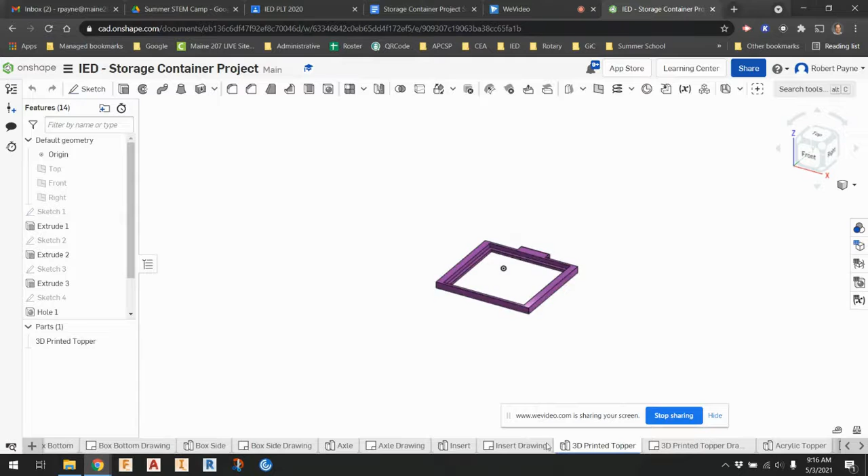If you're looking at your insert, as I have here, or your 3D printed topper, it's a pretty simple process from Onshape. All you do is right click on the tab down here. I'll show it here so it shows up better. You see the export option at the bottom of the list.

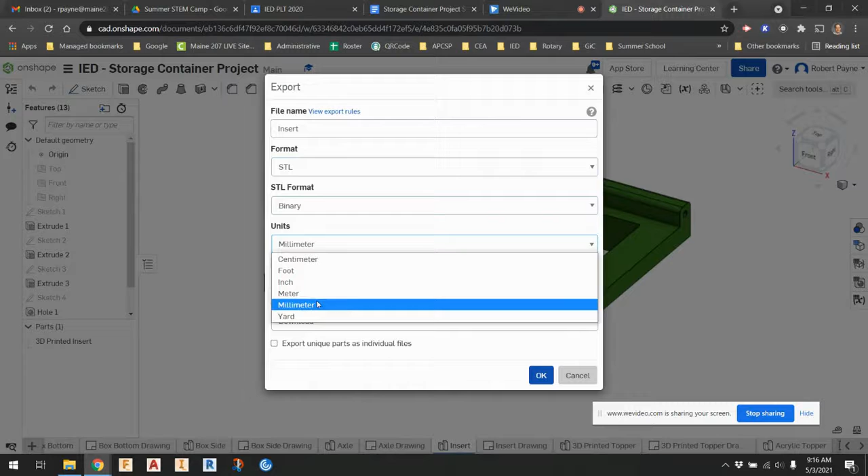And it brings up this. So this is the name of the file, and these are different options for file formats to export it as. We export as STL, in binary format, in millimeters, fine resolution, and just download it. Hit OK.

And from there, you'll do this next part. You should have done this all... I should have mentioned this before, you have to do this on a desktop computer at school.

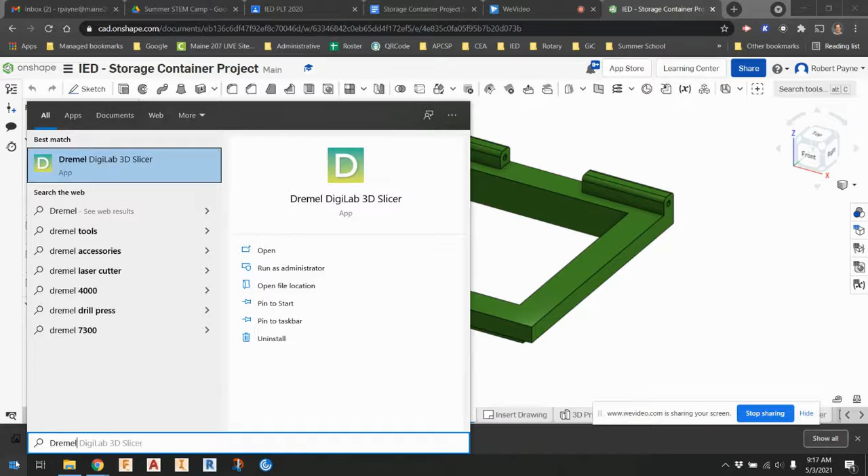From there, you go to the options here, the start menu, and type in Dremel. You should see Dremel Digilab 3D Slicer show up. It will take a minute or so for the software to actually go ahead and get started.

In the meantime, you can download both of them if you want to print them both in the same color. I'll show you how to do that. So export this one as well. As long as everything was correct the first time, it should be correct again this time.

And so here's the software. If it's the first time the computer or your profile is using this, you need to set up the 3D printer. Make sure you set it up as the Dremel 3D45.

And then for material, it should always be set up as Dremel material PLA, and profile medium quality. And then I always recommend using 20% infill. The recommended settings for 20% infill: generate supports, build plate adhesion.

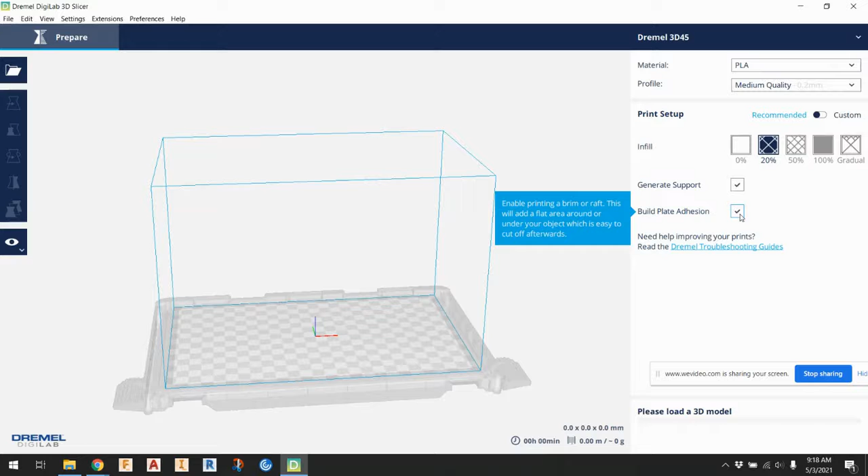To actually import your files, you go to the open menu and you just find the parts that you downloaded, put that there.

If you want to do both at the same time, that means that they will both be the same color filament. You can do them both at the same time, or if you want to do two separate colors, you can do that.

And then the next part is to just go ahead and slice it. That's pretty easy and straightforward. You click on prepare down here. It slices it - that means doing all the math behind it, converting to the file type that the printers can actually understand.

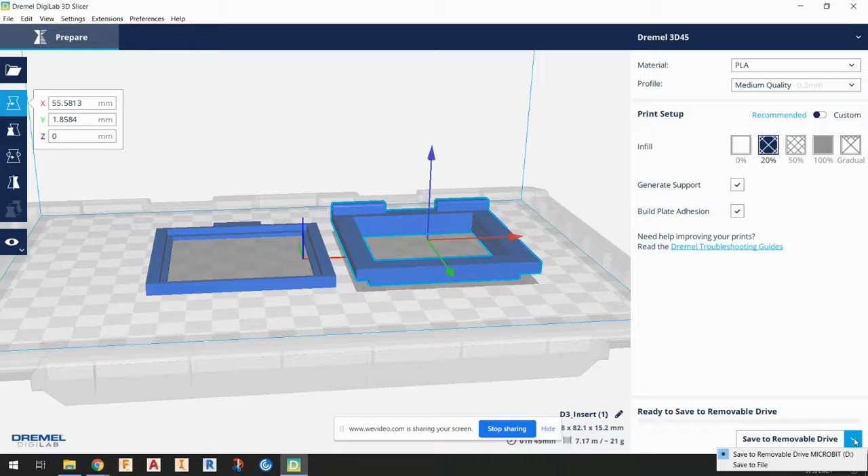And then you go ahead and save it. So I just do save to file. That way you have control over where it saves. You hit save. You save it on either a USB drive or in your U drive, and if you have a USB drive, that's what I recommend - that way you can walk it over to the printers and do it yourself.

If not, save it on your U drive and then submit it in the classroom assignment for 3D printed parts, and Mr. Payne will print it for you.